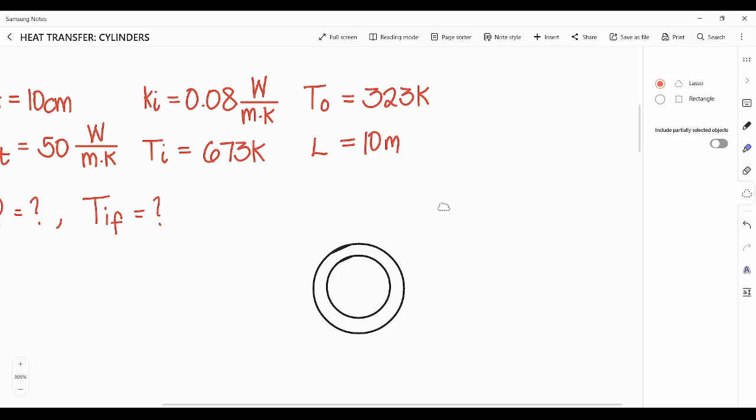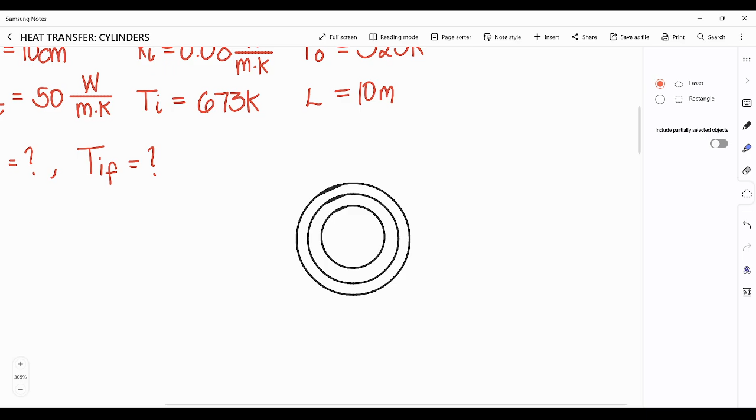How many diameters do we have there? We have 3. If there are 3 diameters, that means we also have 3 radii. We have R1 from the center, and also our radius number 2. We also have our radius number 3, which takes the whole pipe as a whole - the whole diameter, the largest diameter, which is the outer diameter.

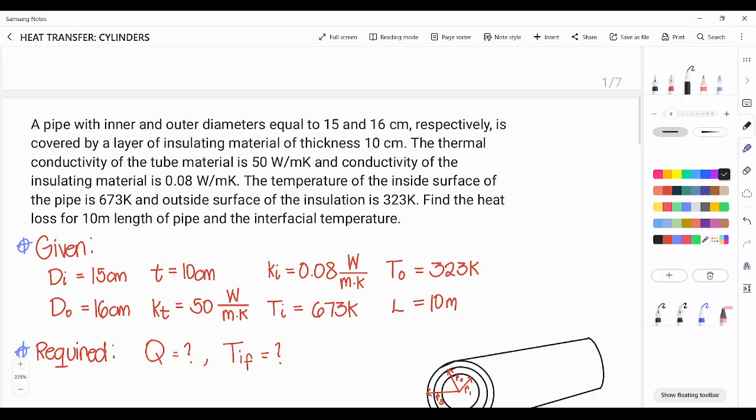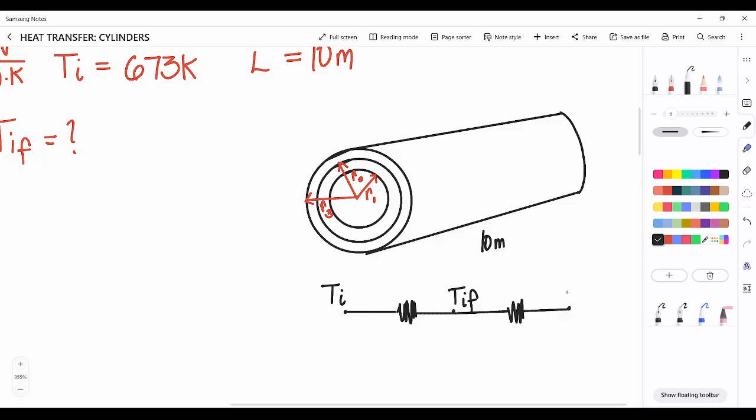It's hotter inside, so maybe it's better if we also draw the thermal circuit. This would be our temperature inside. Then we have layers of insulation and also the pipe, which will produce a resistance to heat transfer. This is our first layer. Then this is the interfacial temperature that we're also asked to find. Then the second layer, which is the layer of the insulating material. Then at the end, our final temperature is the outside temperature.

There's no given convection heat transfer coefficient, so we only have resistance due to conduction for both. This part is the resistance of our tube, our pipe - let's just say RP. And this one is RI, which is the resistance from our insulating material. This thermal circuit isn't actually required, but it's better to have one so you can see the flow - a diagram of what resistances are present in the system. In this case, we only have 2. It's a much simpler problem. So what formula will we use?

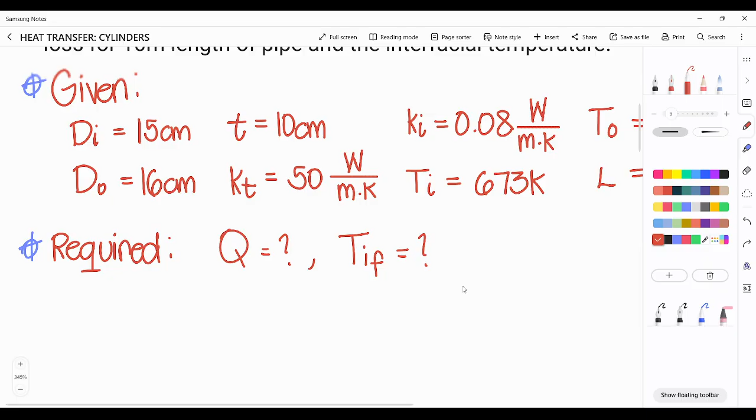We will use the formula for cylinders - this is the only one, they all revolve around this. For cylinders, the total resistance is Ln of outer diameter over inside diameter, or in terms of radius, outer radius over inside radius, over 2 pi k L. I have a marker for that - two loops, 2 pi k L, two loops - so you won't get confused. Delta T over Ln of Ro over Ri.

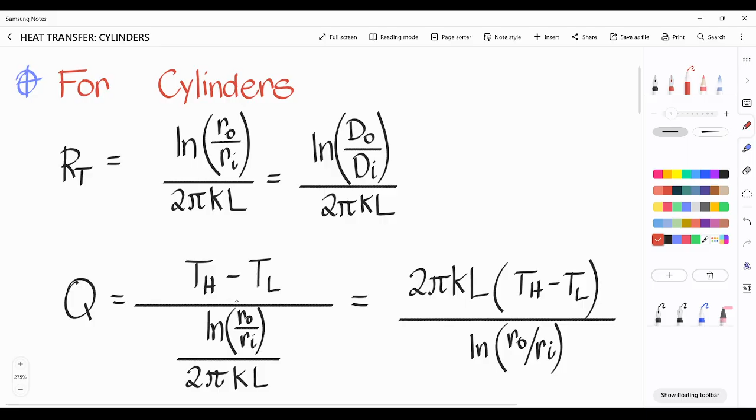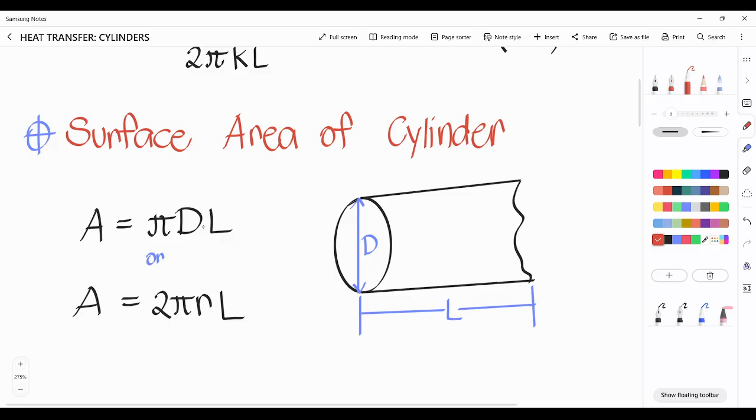Alright, now remember that the surface area of a cylinder is pi d l, where d is the diameter and l is the length, or in terms of radius, 2 pi r l.

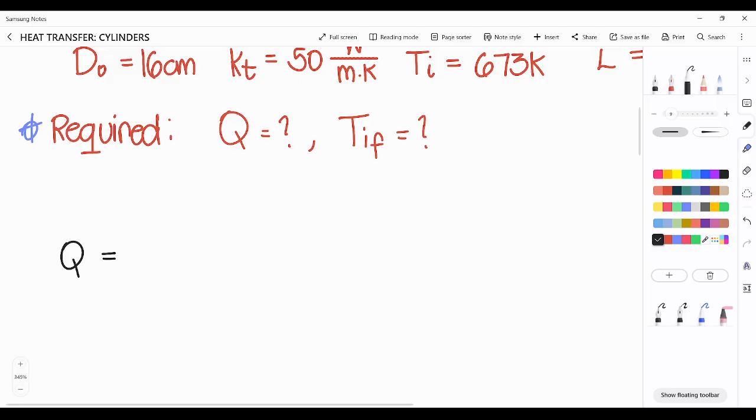Okay, let's solve this problem using our formula for heat transfer in cylinders. Q equals... always remember that delta T is higher minus lower. In this case, the inner temperature is higher compared to the outer temperature. So let's say our delta T is the inner minus the outer temperature.

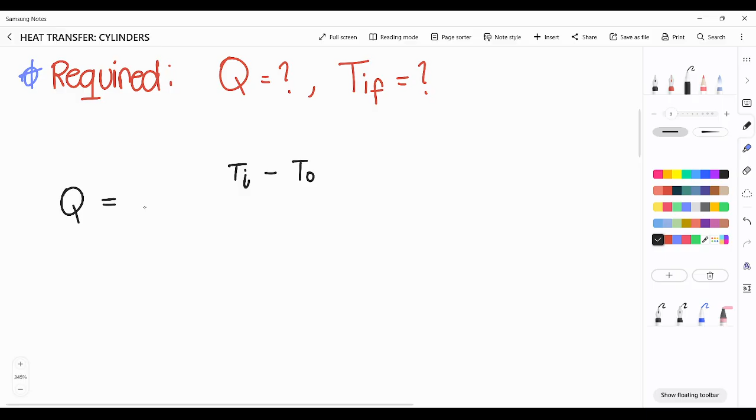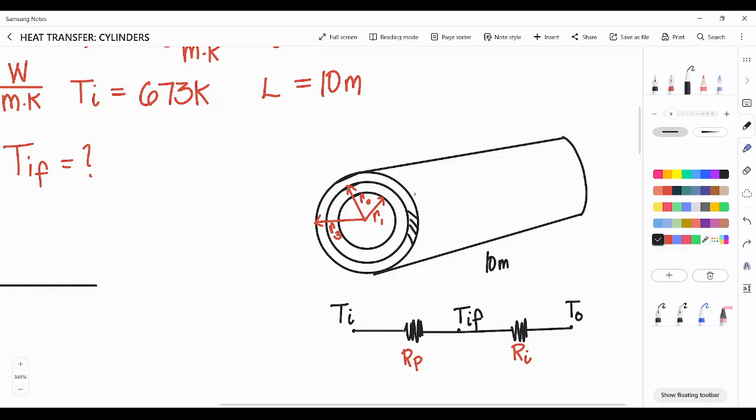Okay, then we have two layers. We have layer 1, this part here - that's our tube, our pipe. And we have the insulating material here. Okay, now let's put that there.

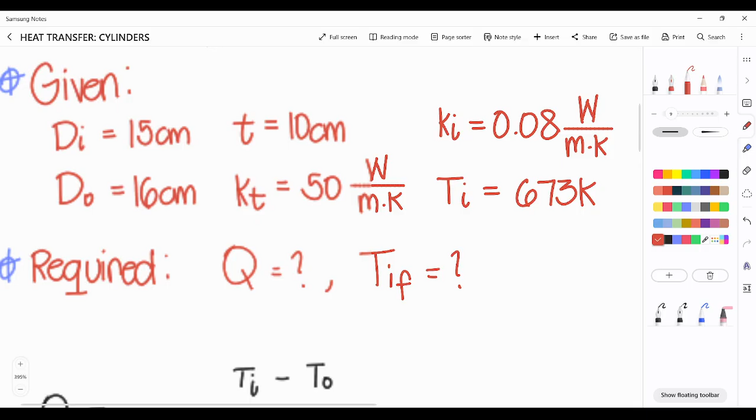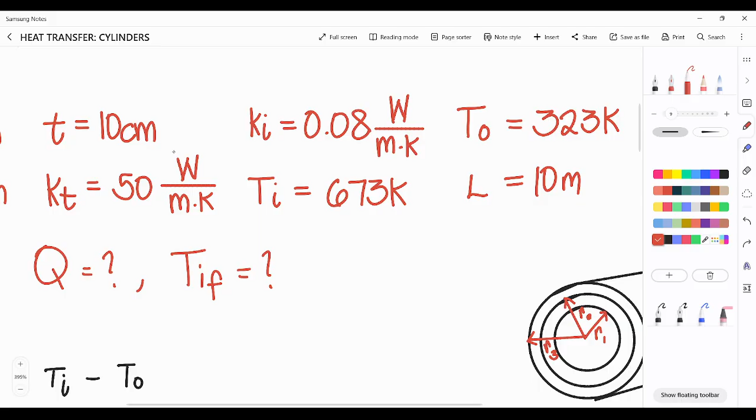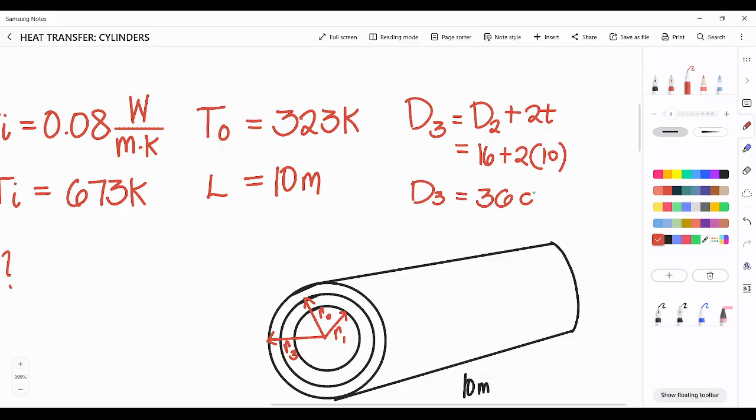Let's just call it D3. D3 is equal to D2, the diameter before it, plus we add the two thicknesses since it's on both sides. So that would be equal to what? Our D2, the outer diameter, is 16, plus 2 times the thickness, which in this case is 10. So 16 plus 2 times 10, whether you use a calculator or do it manually, that equals 36.

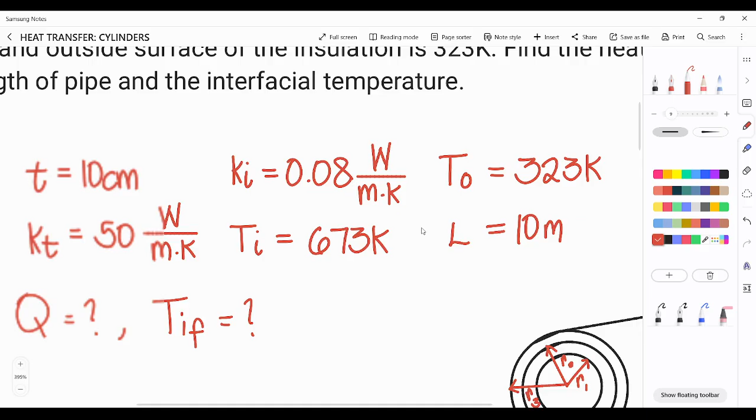And that is in centimeters. So now we know diameter 1 is 15, diameter 2 is 16, and diameter 3 is 36. Okay, now we can proceed. But let's put these as variables first so we can see the formula, so we can just substitute later.

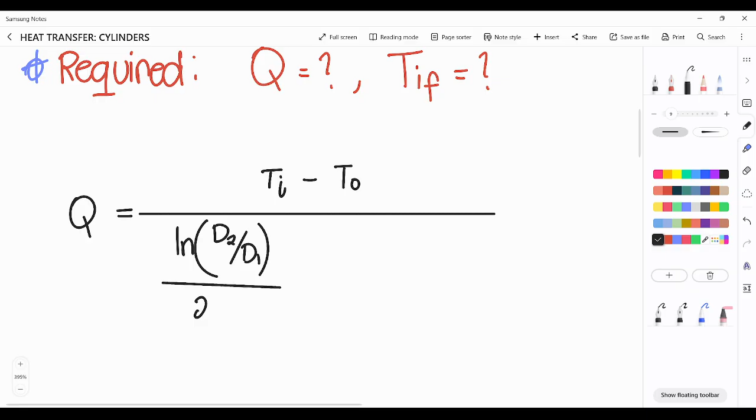This is D2 over D1, over 2 pi. K of this - this is still K of our tube, which is 50 watts per meter Kelvin. Let's call it K sub T. Then the length. Plus, the layer of our insulating material.

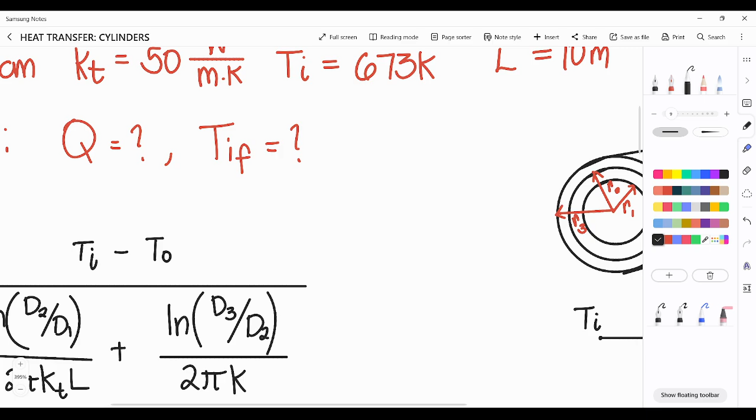And that would be D3 over D2. Just enclose everything in a parenthesis, over 2 pi again. What's the K here? K of the insulating material, which in this case is 0.08 watts per meter Kelvin. Let's call it K sub I, times L.

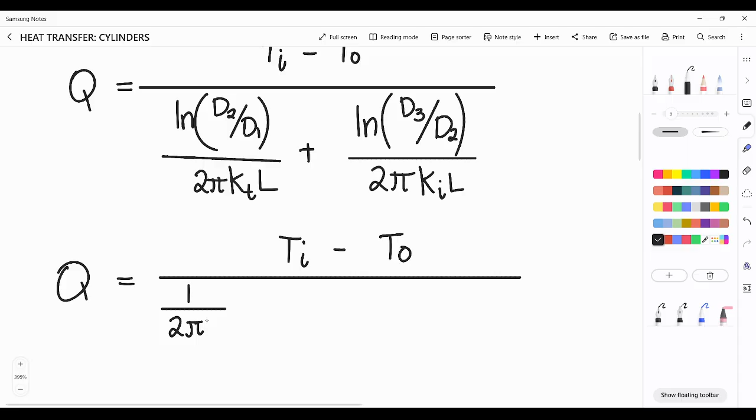What remains is just the Ln of the diameters and the different K values. So we'll end up with Ln of D2 over D1 still, since we've factored out 2 pi and L - just K for the tube, and Ln of D3 over D2, over K sub I for the insulating material.

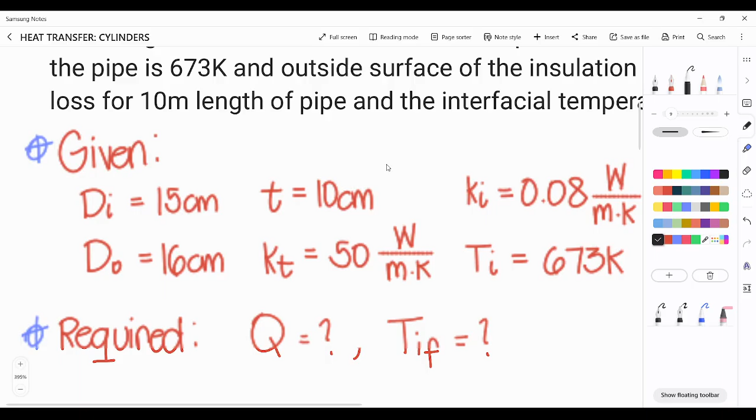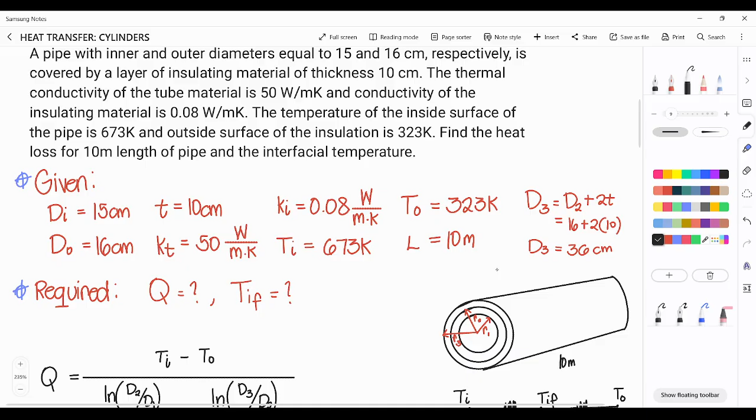Okay, now we simply plug in our values. Based on our given values: 673, 323 Kelvin. The length is 10. Then our diameters are 15, 16, and 36. For the tube, K is 50. And for the insulating material, it's 0.08.

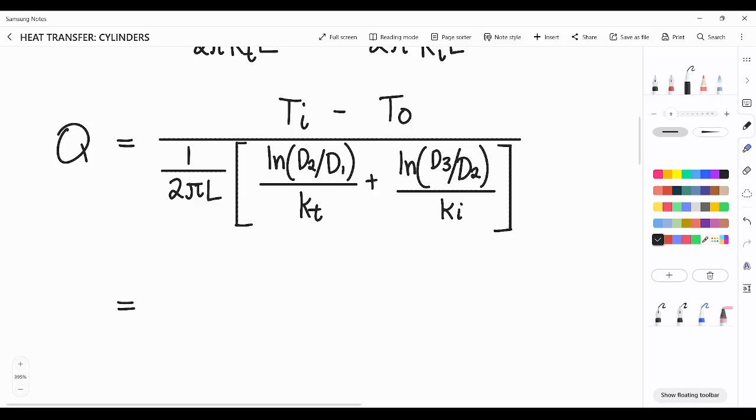Ti, we have the inside temperature, which is hot. Always remember that heat always flows from the hotter region to the colder region. It can't reverse unless you exert input, external work or something that would change or reverse the process, because you need work or energy to do that.

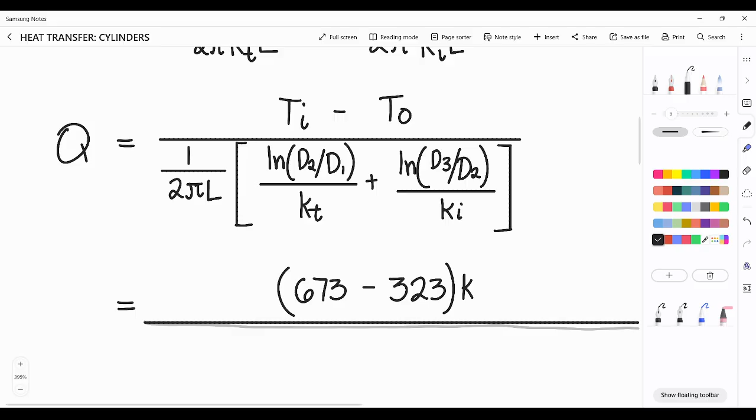So let's factor out 2 pi, which is unitless. Then our length is 10 meters, if I'm not mistaken. And then we proceed with this, Ln of D2 over D1.

Bakit po diameter ang ginamit natin? Hindi po ba radius? It's up to you kasi magka-cancel lang naman yan. Kung radius ang gusto mo, ang diameter over 2 over diameter over 2, cancel lang yung 2. Kaya it doesn't necessarily matter kung anong gamitin natin. Pati sa units, cancel yan.

Ano dito natin? Our diameter 2 is 16 centimeters, ilagay natin para makita natin yung cancellation. Tapos D1 is 15 centimeters, all over K, thermal conductivity ng tube natin, K sub T, na 50 watts per meter Kelvin. Sige, lagay natin watts per meter Kelvin, pangit sumulat, pero pwede na yan basta naintindihan nyo.

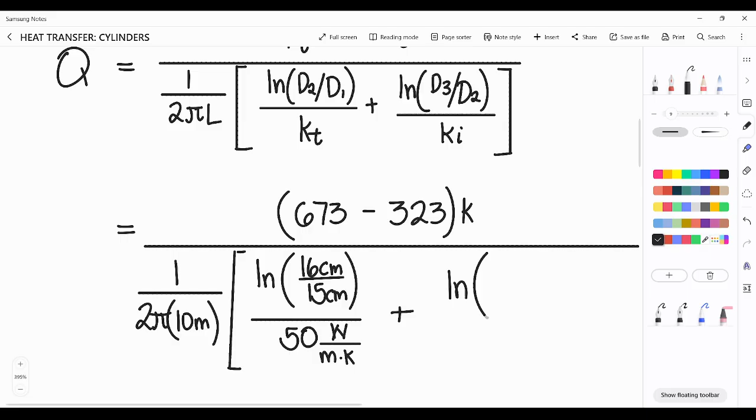Plus Ln ng D3 over D2. Yung D3 natin is yung 36 na na-compute natin kanina, 36 centimeters over D2 na 16 centimeters, all over yung thermal conductivity ng insulating material natin, which is 0.08 watts per meter Kelvin as well.

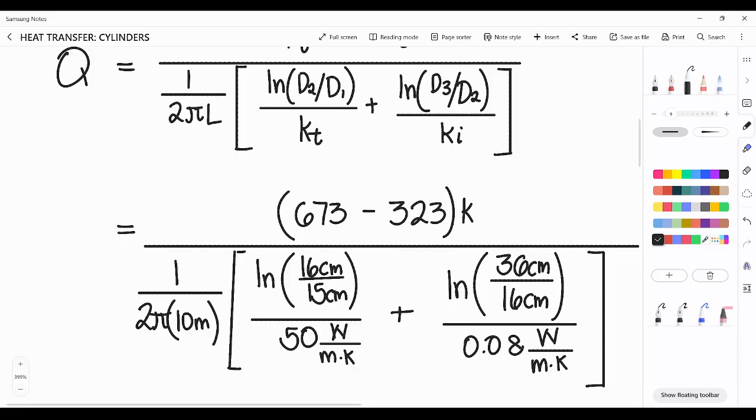Tapos shoot na, pipindutin mo na lang yan sa calculator. Dapat ang lalabas na unit, Q lang naman ang hinahanap dyan, may given naman lahat na length. Magka-cancel dyan yung Kelvin, magka-cancel din yung meters, tapos mag-a-add up lang yung watts, tataas yan dito. So our final unit must be in watts.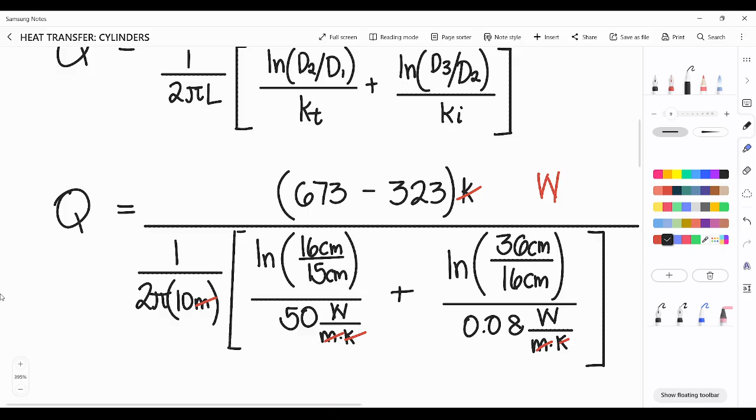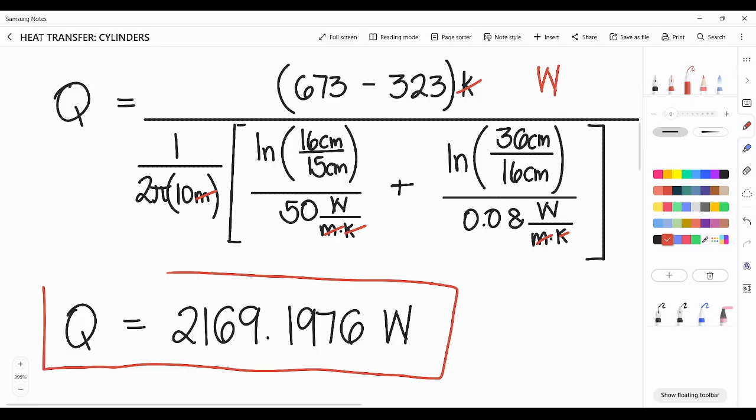Now if you plug everything into your calculator, you will get a final answer. Pindot lang tayo: 2169 point, let's just use 4 decimal places for more accurate answers, 2169.1976, and our unit is in watts. Okay, that would be the answer for sa una nating hinahanap, which is yung heat loss.

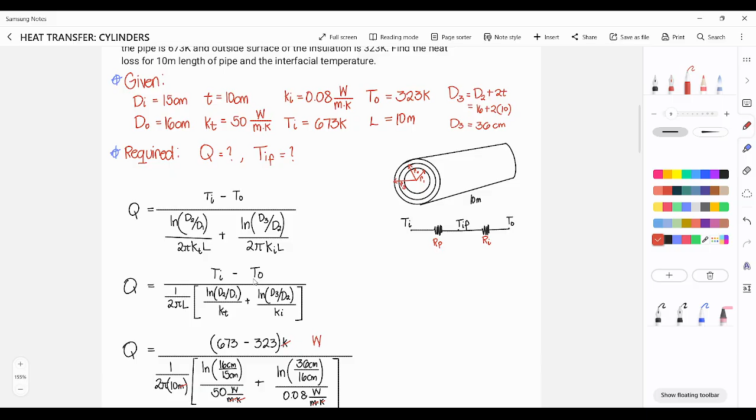Alright, mapapansin nyo na pinapahanap din yung ano nga ulit yun, the interfacial temperature, which is this TIF. Kailangan din natin siya hanapin kasi pinapahanap kung anong sinasabi ng problem, yun ang hahanapin mo.

Wait, ayusin lang natin yung solution natin. Let's palitin lang natin ito ng konti para cute, 'di ba cute yung mga maliliit? Okay, dito na lang natin i-solve sa kabila, dito sa part na to. Let's just add boundary, boundary, okay pwede na yan.

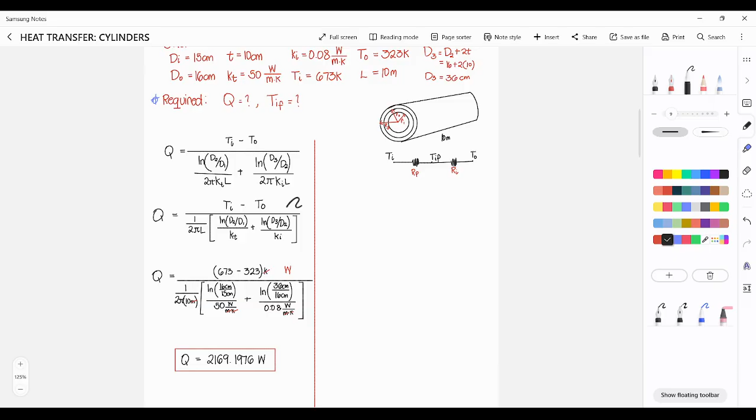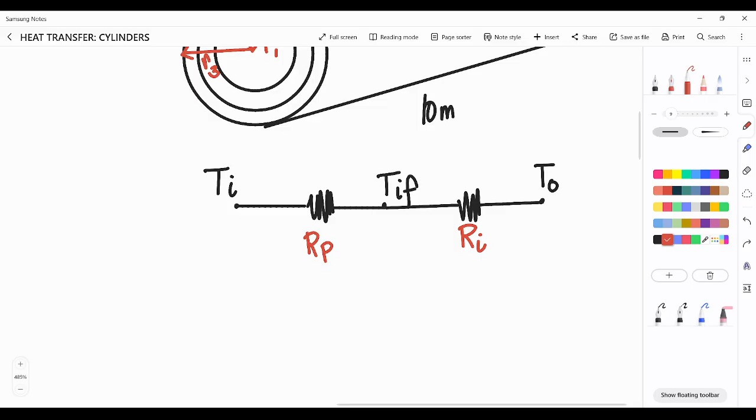Alam natin, by the principle of steady-state heat conduction, ang heat transfer sa bawat segment dyan ay equal. Ibig sabihin we can use that principle para ma-solve ang nawawalang interfacial temperature ng pipe tsaka insulating material. Heat always flows from the hotter region to the colder region, from the region of high energy to the region of low energy. Ibig sabihin, ang Q natin, ang heat transfer natin is going through this direction, paparito lahat, papunta siya sa mababang temperature. Ibig sabihin, Ti is greater than TIF, but TIF is greater than the outer temperature.

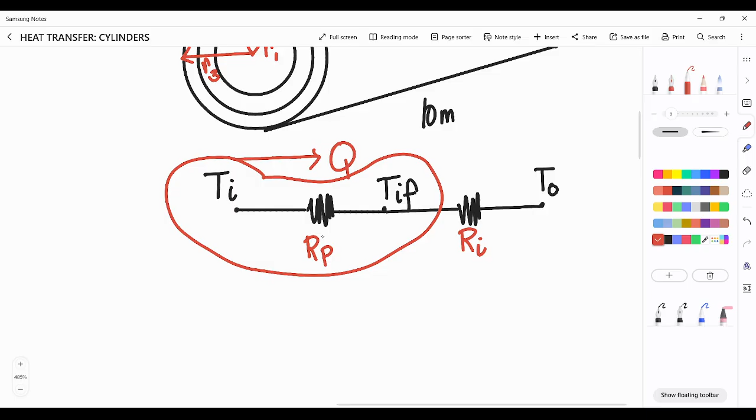Okay, now solving, ang gagamitin lang po natin, since TIF lang hinahanap, is this segment. Ang resistance lang is the resistance of the pipe. So what would be our equation? Let's write it para mas makita natin siya, guys.

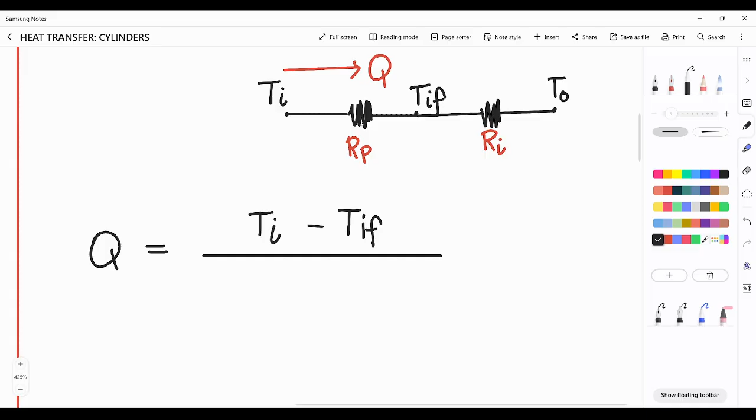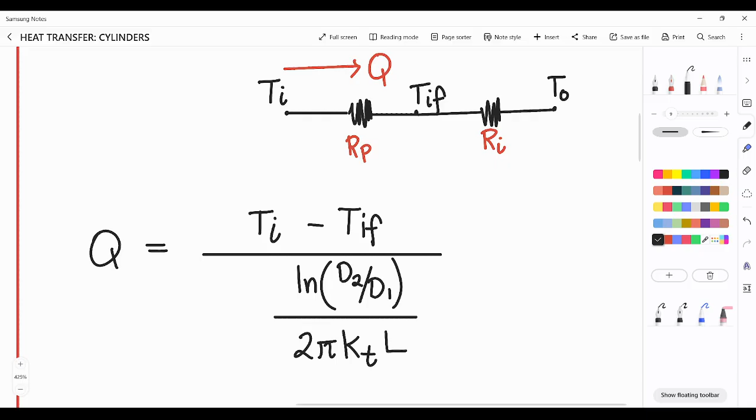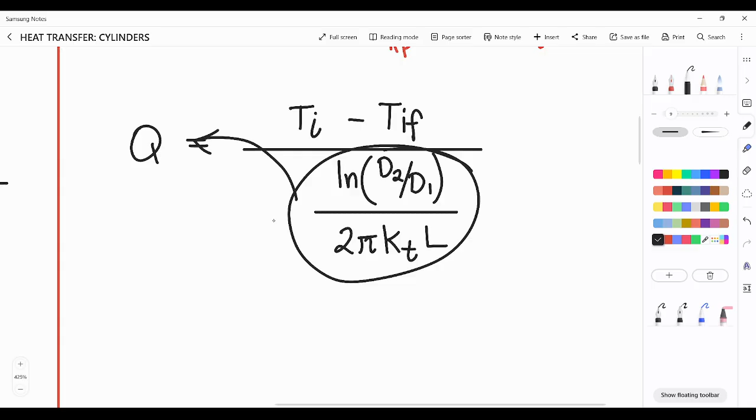Q is, by the principle of steady state heat conduction, equal lang yan, Ti minus the interfacial temperature, over, since iisa lang yung resistance sa pagitan nila, yun lang gagamitin natin, which is the resistance of the pipe, Ln ng D2 over D1 all over 2 pi K ng tube, times the length. Tapos we simply i-manipulate to, tataas to dito, magmumultiply siya sa Q. Tapos anong mangyayari sa Ti? Pwede natin silang pagbalik na rin para mag-cancel out lang yung negative sign.

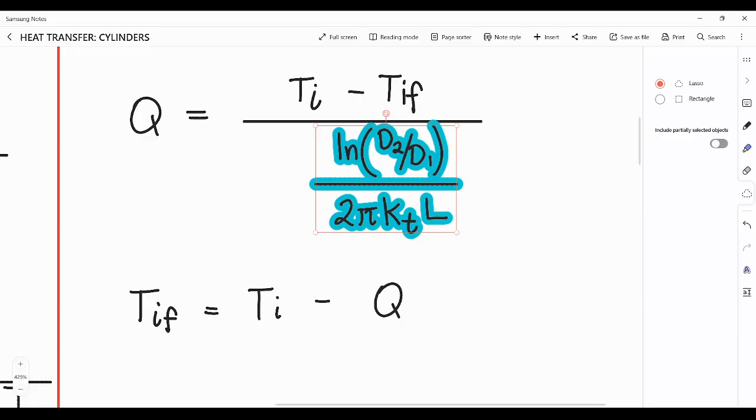Sulat natin, diretso na ha. Our interfacial temperature would be equal to the inside temperature minus Q times itong nasa ilalim. Yan, shortcut para di na natin siya isulat ulit. Tapos salpak na lang tayo ng values. And our final unit should be in Kelvin, pag naging watts yan, mag-isip ka, temperature naka-watts.

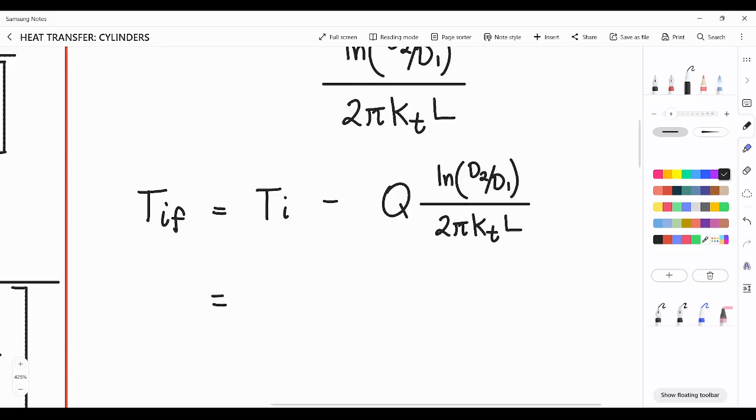Anyway, let's just plug in our values. Ti is equal to, the inside temperature is 673, that is in Kelvin. Tapos ang heat natin kanina, heat loss is 2169.1976.

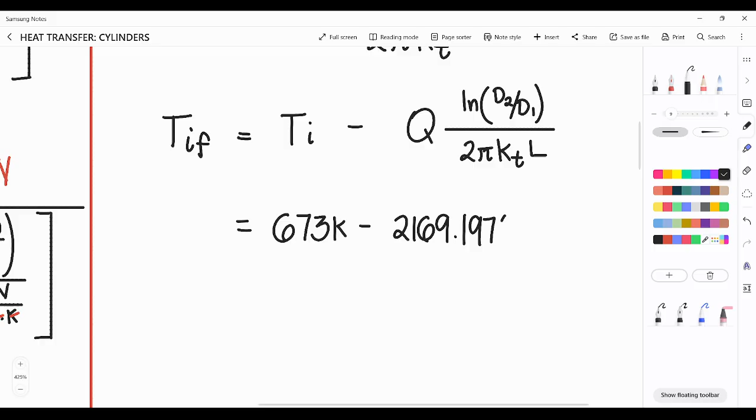Times, let's just put this in a bracket para mas organize. D2 is 16, D1 is 15, all over 2 pi, K is 50, and our length is 10. Yeah, that would be the values, and again this should be in Kelvin.

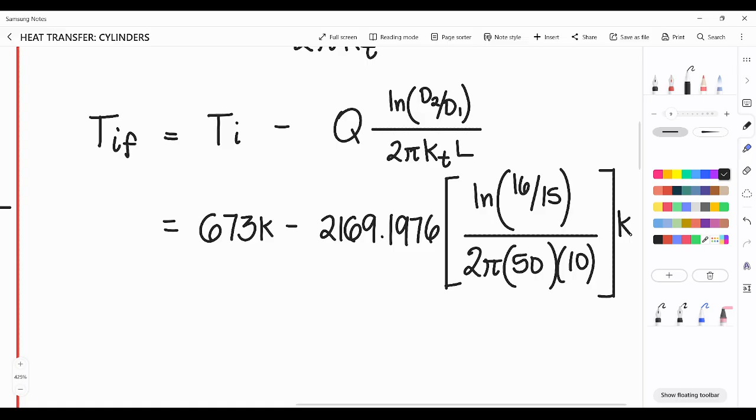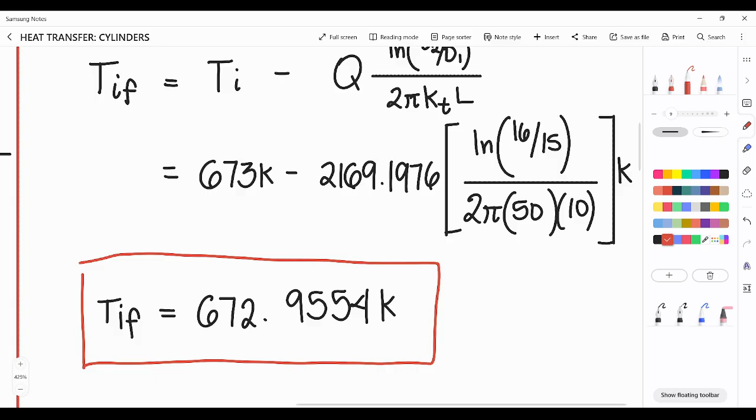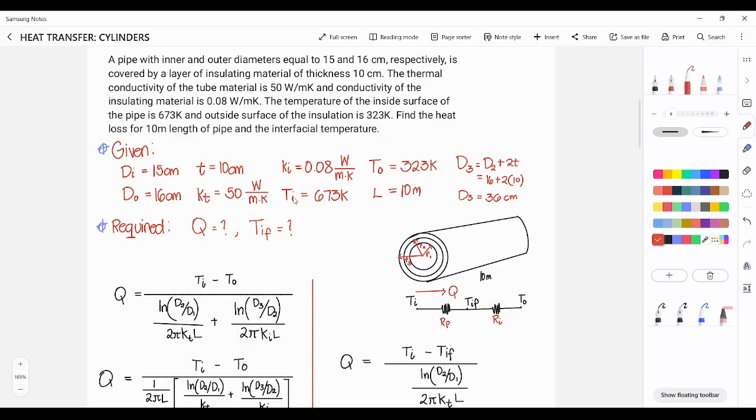Tapos pag pinindot natin yun sa calculator, ang lalabas na sagot for our interfacial temperature will be 672.9554 Kelvin. That is our value for yung hinahanap nating interfacial temperature. So dyan lang umiikot yung mga heat transfer sa cylinders, or basically most applicable sa mga pipes natin. Alright, that is all, nakahanap na natin yung Q, 2169.1976, and the interfacial temperature ng pipe tsaka ng insulating material, which is equal to 672.9554.